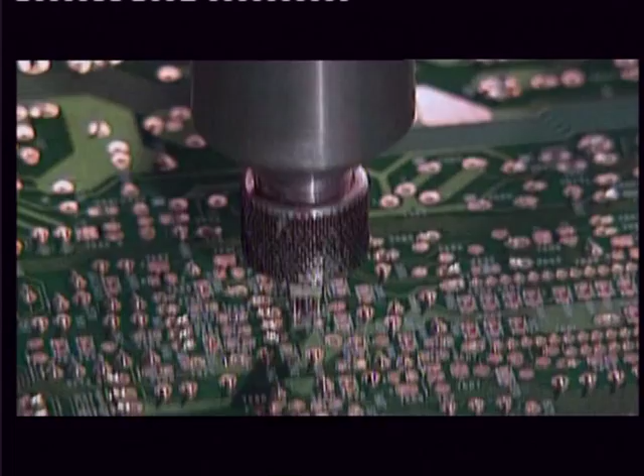NOMADITE represents a new concept in the manufacture of houses and buildings that combines maximum construction quality, leading-edge seismic protection, and the most demanding sustainable ecology criteria.

NOMADITE is not only chiefly a project for opportunity, but also a creator of industrial fabric and economic wealth that generates thousands of direct jobs.

NOMADITE is a future commitment towards local, regional and national economic regeneration based on a new, solid and firmly established industry that creates abundant, stable employment.

NOMADITE is a system for building sustainable cities. NOMADITE, we build sustainable cities.

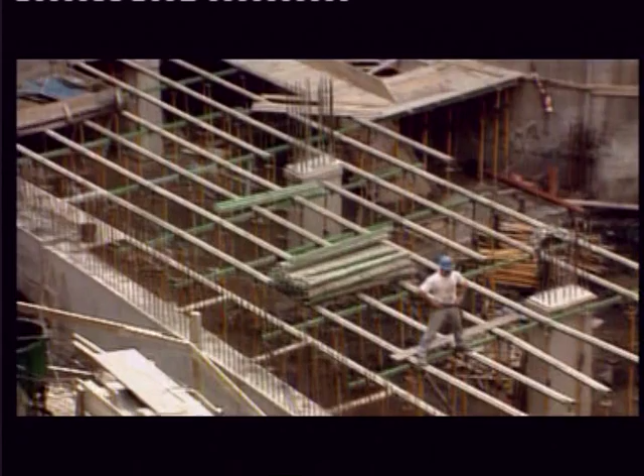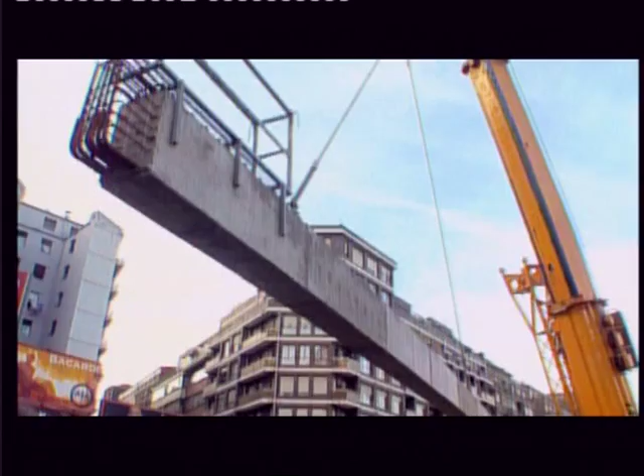Though we are in the 21st century, the building industry remains a non-standardized, almost artisanal process. This in turn implies unpredictable oscillations and tolerances in the final quality of constructed buildings, delays in execution times, and significant labor mortality rates in the sector.

Why can't we manufacture buildings in a controlled, stable production plant environment?

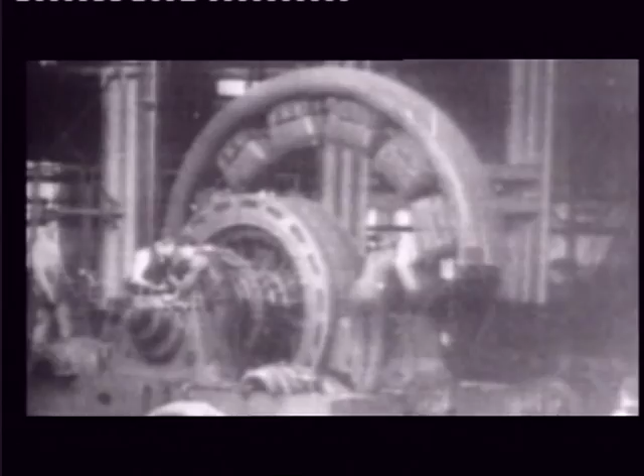Henry Ford invented neither cars nor production lines. He did, however, join both of these concepts together at a time, the beginning of the 20th century, when they were mere pipe dreams. By doing this, he achieved spectacular cost savings, shorter production times, and increased reliability regarding quality processes. And this drastic cut in the final price of cars led to the real democratization of cars.

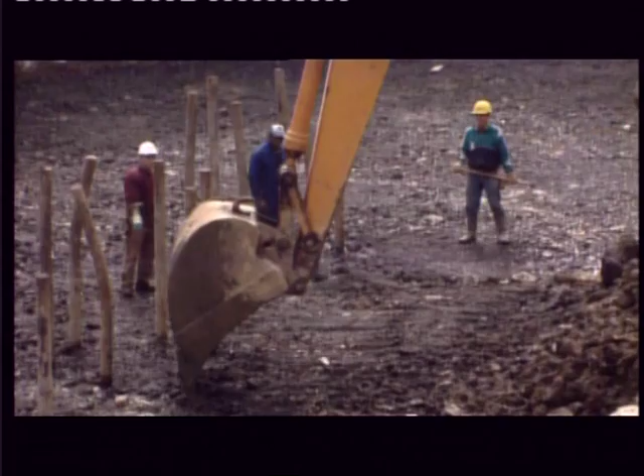This same historical leap forward has also happened in the building industry, with the NOMADITE system for building houses and buildings in a factory environment.

We're talking here about buildings that are far superior to those built in situ as far as structural robustness, habitability, longevity and design are concerned.

Homes which, quite apart from the obvious advantages derived from industrialized process, additionally offer optimum connectivity and other domotic systems and proven energy efficiency.

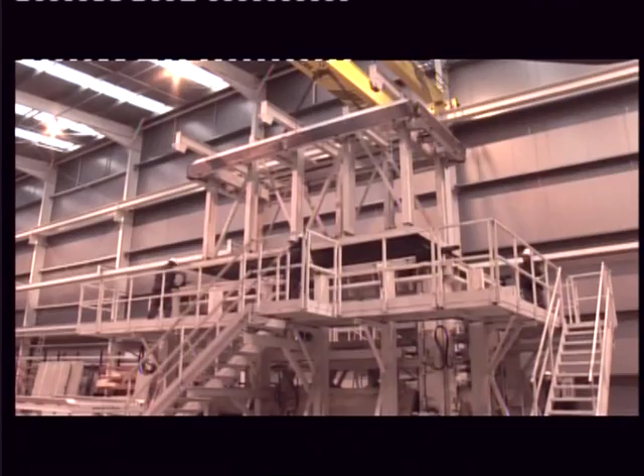But above all else, we're talking about generating industrial fabric and wealth, no matter where the manufacturing plants are located. NOMADITE is so much more than just an innovative construction system. NOMADITE is a driving force project for social and economic development for the future.

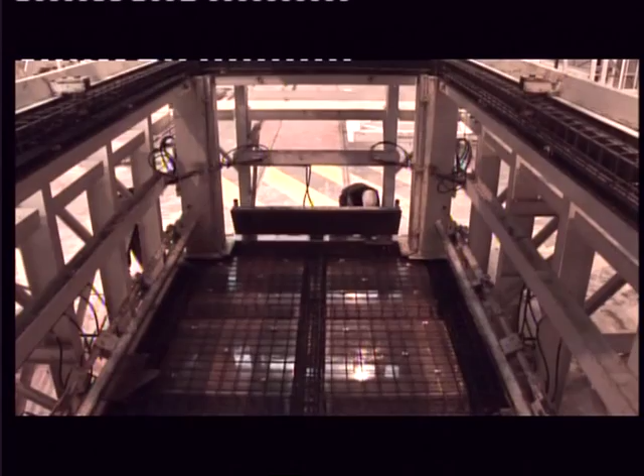NOMADITE buildings are the result of the architectural combination of modules or units that can be shipped to building sites using conventional transport.

Buildings are erected in situ to ground level or level 0. Units and system elements are then assembled and added.

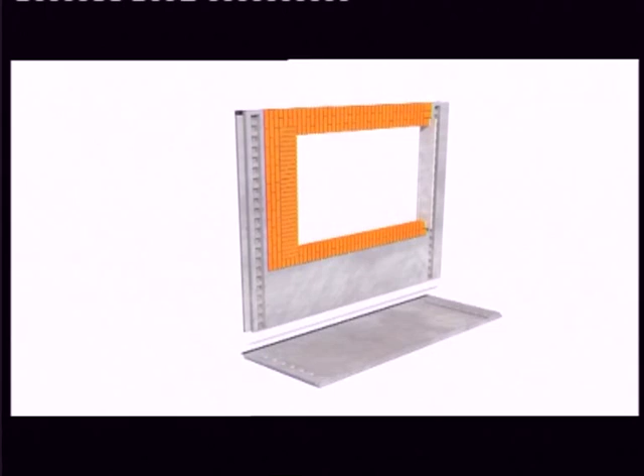Each unit is built with all its sanitary and electrical installations completely installed. Optionally, units can also be built and supplied fully equipped with pneumatic, heating and air conditioning.

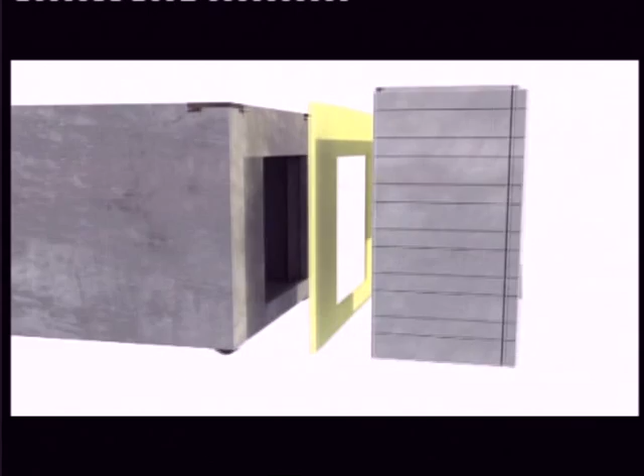The building material chosen for this building process is reinforced pre-stressed concrete, which offers longer life, resistance and behavior compared to any other high-quality building material, thanks to its being hardened and set in a completely controlled environment.

NOMADITE buildings and houses all have the same finish, and they offer exactly the same feelings as buildings built using traditional methods. The only difference being considerable cost savings, easy, fast execution times, and the unbeatable quality of their final finishes, all possible thanks to the industrialized processes used in their construction.

NOMADITE is a project for economic development based on the erection of large industrial installations having production capacities of some 5,000 buildings per year. It's an important industry that generates thousands of direct jobs and wealth in other economic sectors.

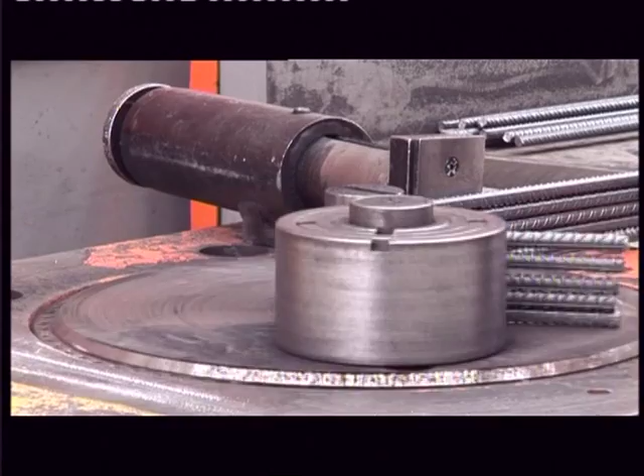The factory manufacture of homes introduces a completely new safety philosophy in the workplace, something that drastically reduces possible danger in the workplace and saves many human lives.

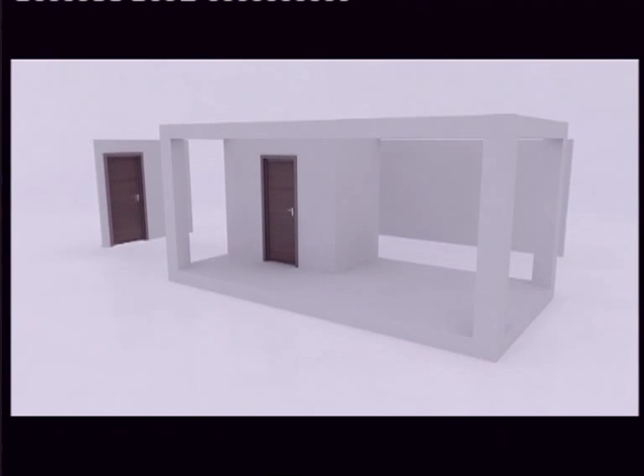Homes based upon the manufacture of units incorporating all possible equipment, installations and finishes, from flooring and tiling to kitchen and bathroom furnishings.

The units are transported to building sites using conventional transport without the need for special, costly transport systems. Thanks to factory manufacture, the building process is reduced by three-fifths.

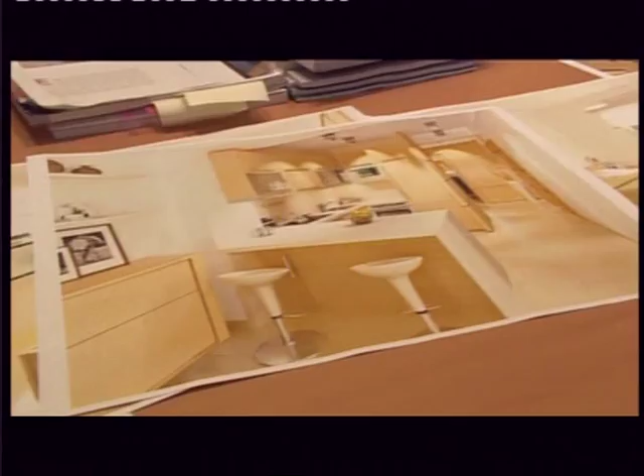NOMADITE provides a strategic solution to the housing shortage problem in those markets in which offer is less than demand, thereby contributing directly towards social program implementation in developing countries.

But exactly how does the installation of a factory with these characteristics affect its surroundings?

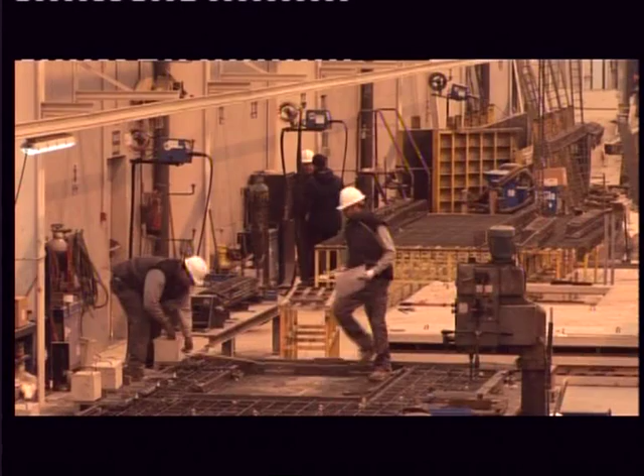NOMADITE is much more than just a revolutionary building method. It's an important development project and stimulating opportunity for the future in those regions in which it's implemented.

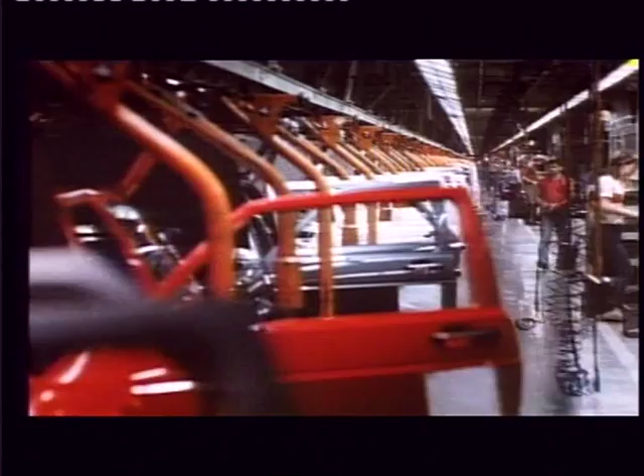Installations of this size generate thousands of jobs and a complementary industrial fabric similar to a car manufacturing plant.

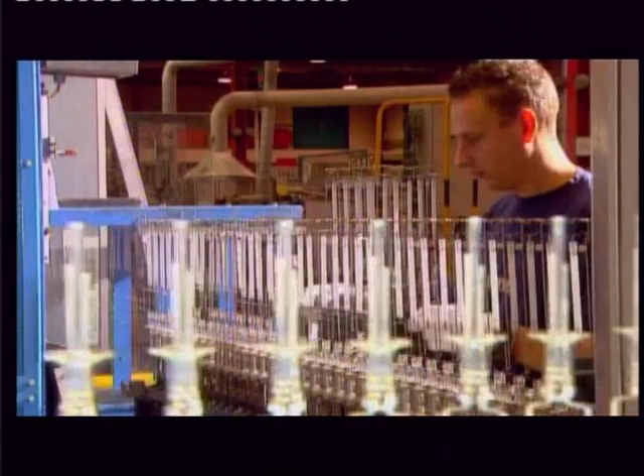An installation of these characteristics acts as a driving force for local economy, stimulating and dynamizing the development of numerous sectors, such as those regarding the manufacture and sales of specific products for home furnishing, transport and services.

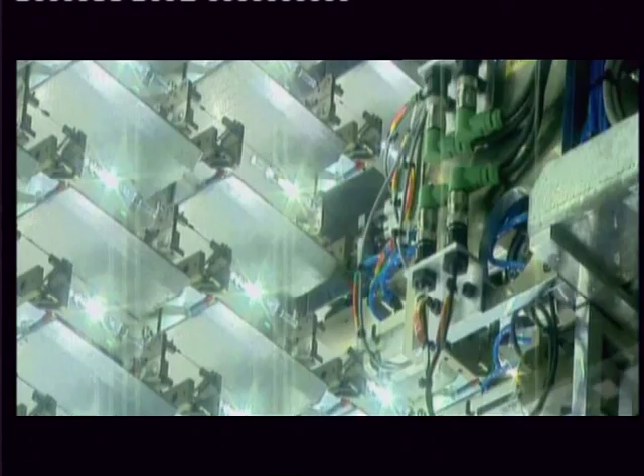The factory generates several thousand direct jobs in production, administration and logistics, as well as a vast number of indirect jobs. Thousands of stable jobs that in turn demand other sales, leisure and transport activities, as well as improved public services.

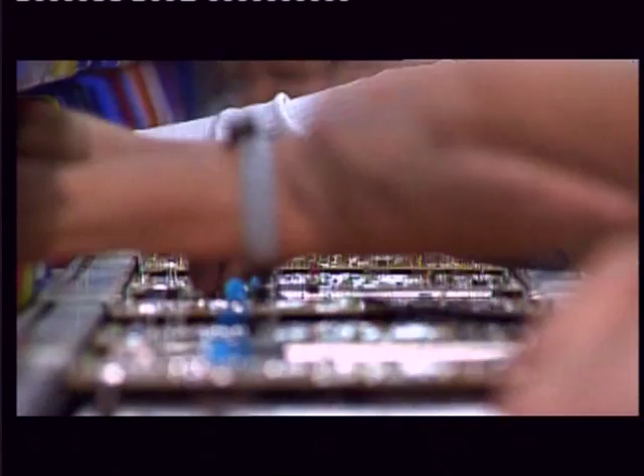Sustained economic growth that generates improvements in infrastructures and boosts small and medium-sized industries and services. In short, a project for the future regarding social well-being.

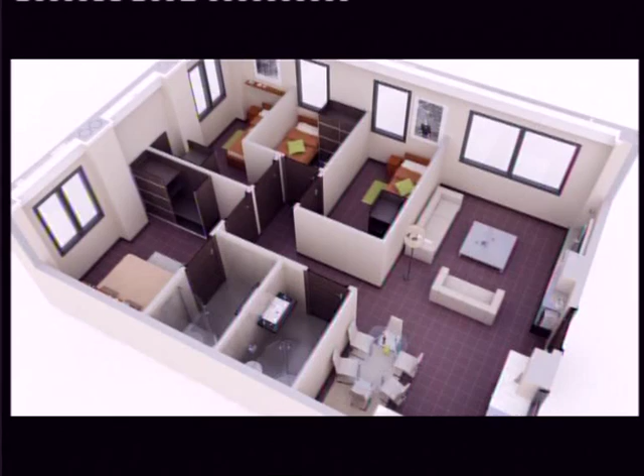NOMADITE provides social housing schemes and programs to supply those less favored strata of society not only with single-family homes, but also high-rise buildings and projects which include hospitals, schools and health centers, oriented towards those markets that need to meet their most basic needs.

The industrialized manufacturing of buildings represents an important step forward in the democratization of decent homes in surroundings in which access to housing is both difficult and scarce, something that leads to the problem of shanty towns and negatively influences the quality of life of their inhabitants.

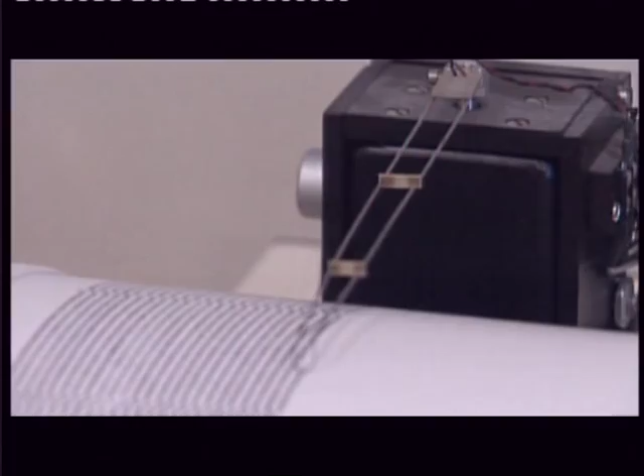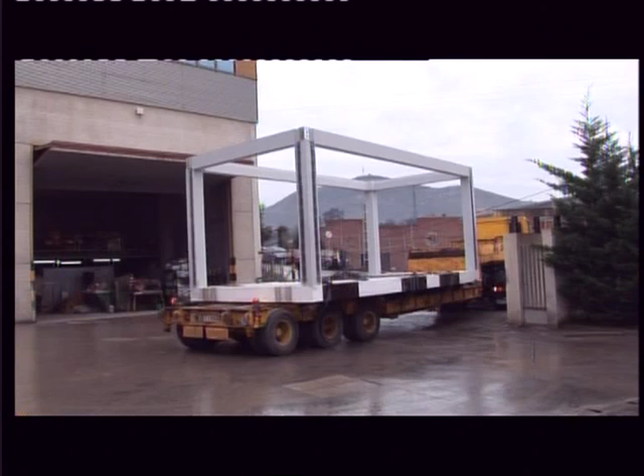NOMADITE buildings are in themselves the optimum solution for those regions conditioned by the presence of frequent seismic movements that affect community development. Those buildings and single-family units developed by NOMADITE are designed so that their structures redistribute forces and loads produced by natural catastrophes in the most efficient way possible, protecting the integrity of the buildings, preventing their collapse and, above all else, by providing structural units that are stable in themselves and which protect the people at their interiors.

Likewise, the NOMADITE construction system represents the best possible alternative in the case of natural disasters, in which temporary rehousing of the homeless is of the utmost priority, immediately followed by the task of rebuilding.

Under such circumstances, the NOMADITE units used initially as provisional or temporary housing can then be used as part of permanent buildings, with the corresponding enormous savings in shelters and buildings, whilst allowing far quicker reconstruction of the affected area, and the speedier erection of more sustainable buildings that are better prepared to withstand natural disasters in the future.

In turn, units or modules manufactured using the NOMADITE system make new sustainable town planning easier, which results in the improved safety and quality of life of their inhabitants.

The system allows configuration of a wide range of relocatable buildings covering the specific requirements of the mining and oil industries regarding the housing requirements of workers.

At the same time, upon conclusion of all extraction work, the units can either be used to form permanent settlements as part of a social proposal for community housing, or they may be relocated to new operational sites.

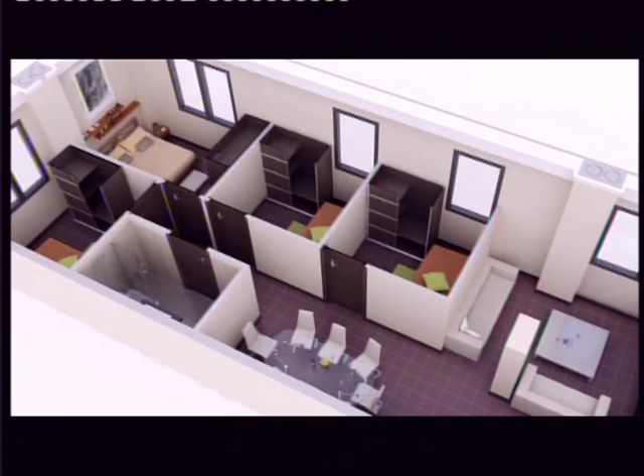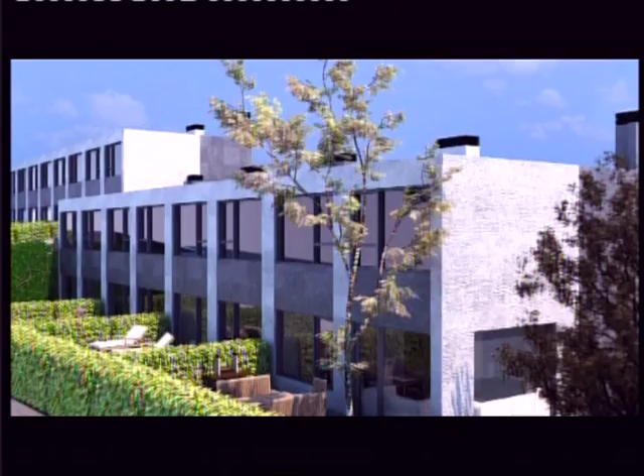In addition to programs and schemes of a purely social character aimed at improving housing, the flexibility of the system also allows us to offer programs adapted to local standards of state-subsidized housing, high-quality apartment blocks, single-family bungalows, and the Excellence series of luxury homes.

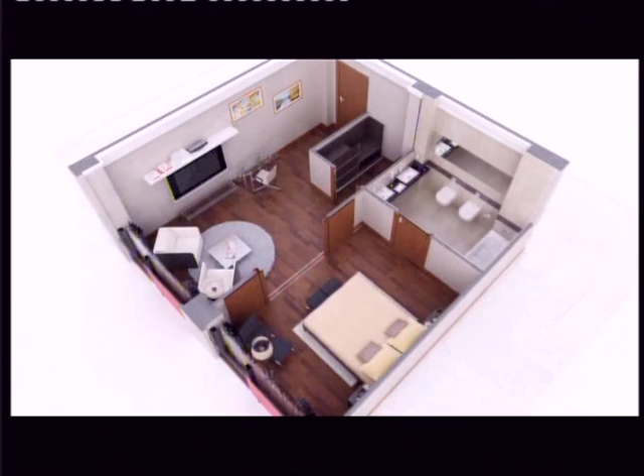At the same time, NOMADITE also contemplates the construction of hotels and residences, which, thanks to the capacity of the system, allows the manufacture of hotel rooms, mini, executive and presidential suites in a standardized fashion, thereby drastically reducing costs and improving quality whilst simplifying the maintenance procedures of them all.

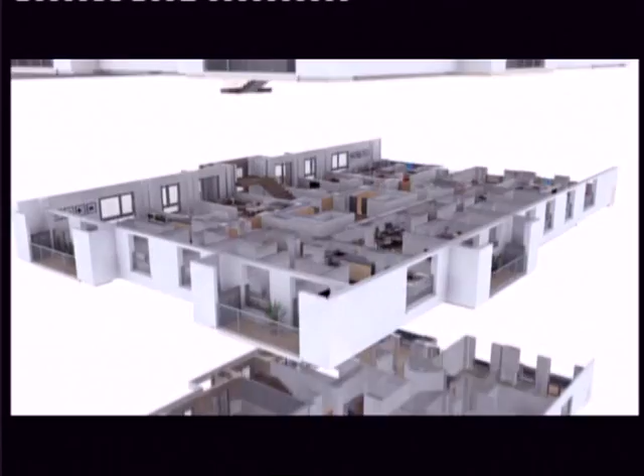NOMADITE additionally allows faster building, with an effective reduction of some 60% in the total execution time of work and a rigorous and proven time control that minimizes possible delays, thereby doing away with those fluctuations in budget that normally affect the building sector by turning buildings into manufactured products.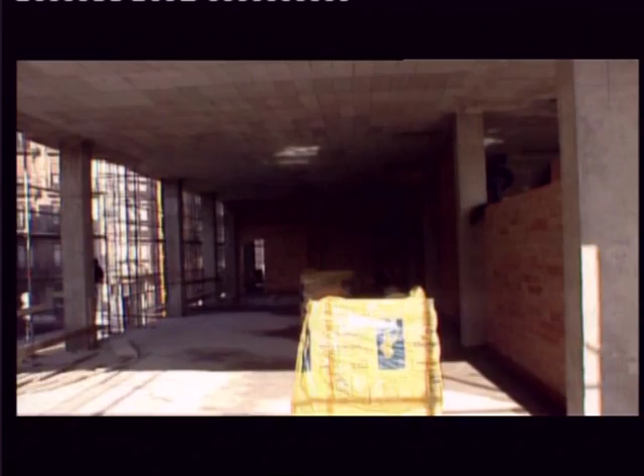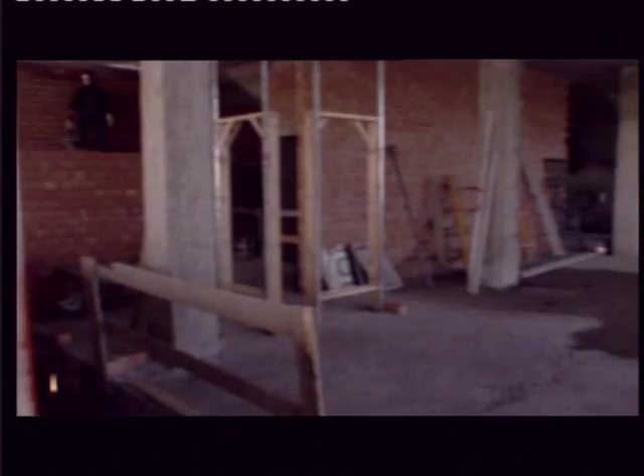The incidence of the NOMADITE system on the social labor environment is overwhelming. Safety measures are more rigorous and controllable in an industrial manufacturing environment. This results in the drastic reduction of accidents in the workplace, in a sector whose accident rate is already very high.

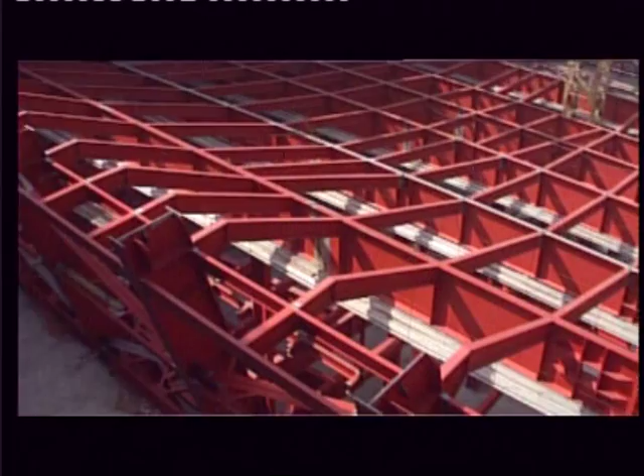All workers do their jobs on the same level. This means that falls or blows caused by falling objects and tools, which currently account for 36% and 19% of deaths respectively, disappear completely.

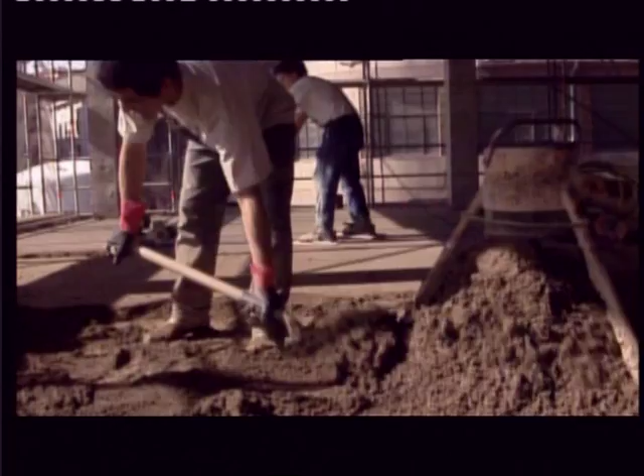NOMADITE saves lives. Injuries are also reduced in the same proportion. Accordingly, the social cost of having workers off sick on account of accidents in the workplace, a previously serious problem with a very complicated solution in the building sector, is also reduced.

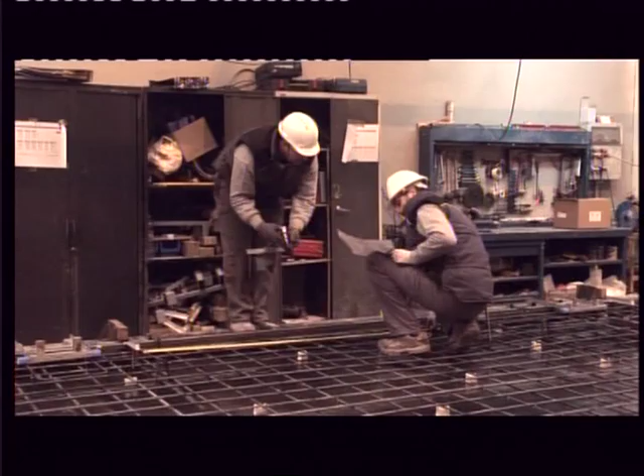Workers work in a climatically controlled environment in optimum light conditions. Furthermore, manufacturing or production processes never come to a halt on account of adverse weather conditions. Conditions of hygiene for workers are far superior to those found on site, and our factories are equipped with changing rooms, showers, canteens and rest areas for workers.

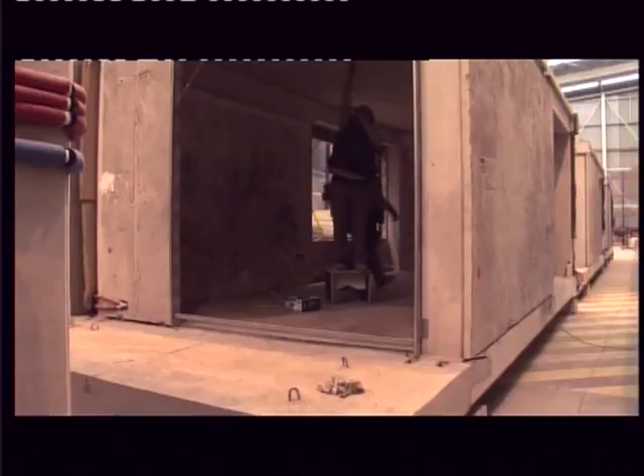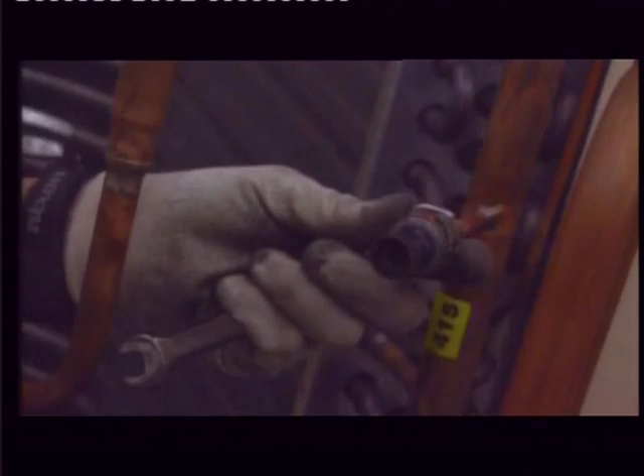NOMADITE is much more than just a new concept in building that combines technology, quality and ecology. NOMADITE represents the creation of a new industrial fabric, local economic wealth and stable employment. NOMADITE is a true driving force for regional development, which generates synergies in both the building industry and services. NOMADITE is, without doubt, a project for opportunity.

NOMADITE. We build today like others will try to build tomorrow.